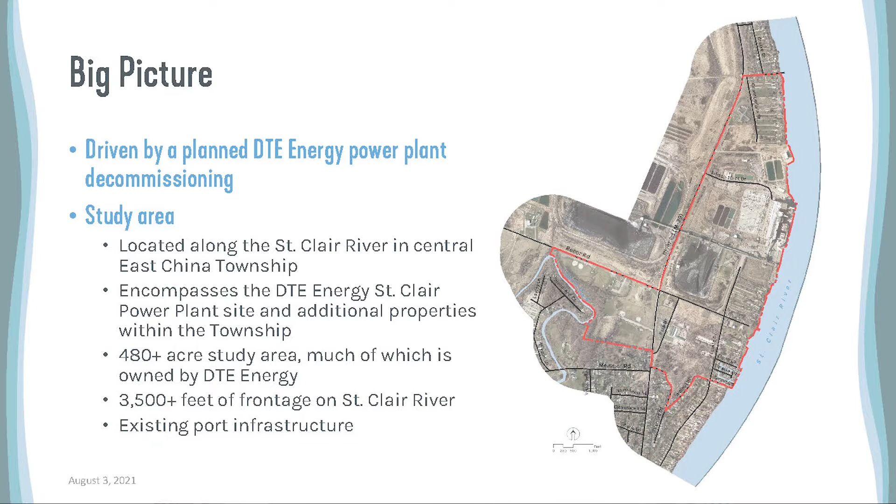So this study is not just a focus on the DTE site, in recognition that the DTE site doesn't just live in a vacuum or on an island of its own. It's integrated amongst other uses—residential, commercial, industrial. So if we're going to think conceptually about how the DTE site could transition over time, we also have to think about the surrounding land uses. Some of you probably are residents either nearby or within the study area. So rest assured we're going to be considering how land use, transportation facilities, and infrastructure are all intertwined within this study area.

So this map kind of shows the study area, which is in the central portion of East China Township. And you can see the St. Clair River there, so we're kind of in the middle, about halfway between Lake Huron and Lake St. Clair.

So one of the reasons the township wanted to move forward with this study is they know this could have a significant regional impact and opportunities to benefit the region. With the closure of a power plant, you have a large site that's heavily industrialized right now that could become an opportunity for redevelopment. That economic development potential could attract job producers or different diverse land uses. There's also an opportunity to restore and protect the environment and encourage environmental sustainability, and an opportunity to potentially have new public lands or opportunities to recreate in and near the water. So that's some of the reasons for this study.

The township is thinking, okay, what are going to be the keys to having a successful plan? Certainly, with DTE being the largest landowner within the study area and clearly a major stakeholder, we wanted to ensure that this plan has close coordination with DTE Energy. And that's why DTE Energy is with us tonight and a part of this process.

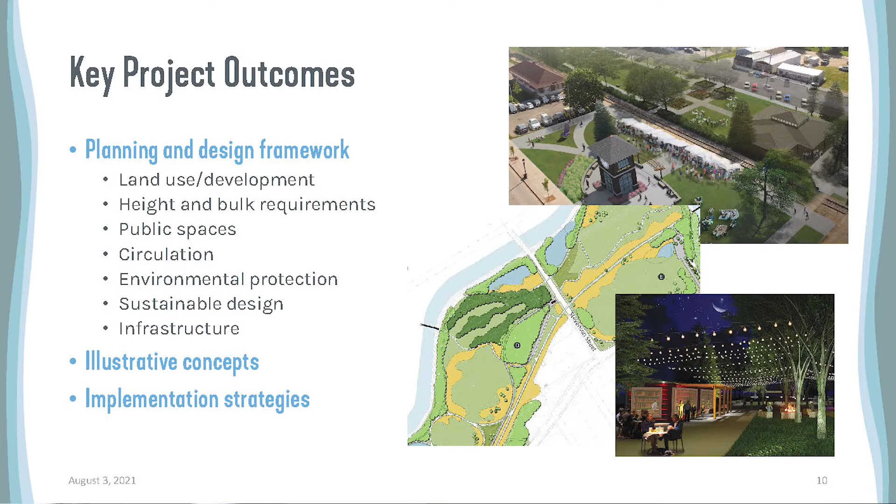And then lastly, before I open it up for some questions on this section, the schedule for this planning project. So we started earlier this year doing some background and existing conditions evaluations. I'll present to you some of the highlights and what we found. We also looked at environmental characteristics. And here we are tonight at the public informational kickoff meeting. So this is really the first launch of this project to the public. We're trying to provide some good information for you tonight so you have a good understanding of what this project is all about.

After this meeting, we're going to get into some additional work, research, and analysis. We're going to maybe look at some redevelopment scenarios. We're going to start thinking about the future, what could be. But we're, of course, going to come back to you in a session, maybe in the same facility, but you might be sitting around tables for that session. I'm not sure, we'll come up with the format for it. But right now we're calling it a public visioning or charrette session.

Basically, that's going to be more about working with you to bring in ideas to help provide some feedback to our team so that we know what you would like to see moving forward for this project. And then it kind of continues on. So we're looking at before the end of March 31st next year to have this planning project finished up. As I said, there will be a public hearing in front of the Planning Commission that would occur probably at the end of this year, maybe January or February of next year.

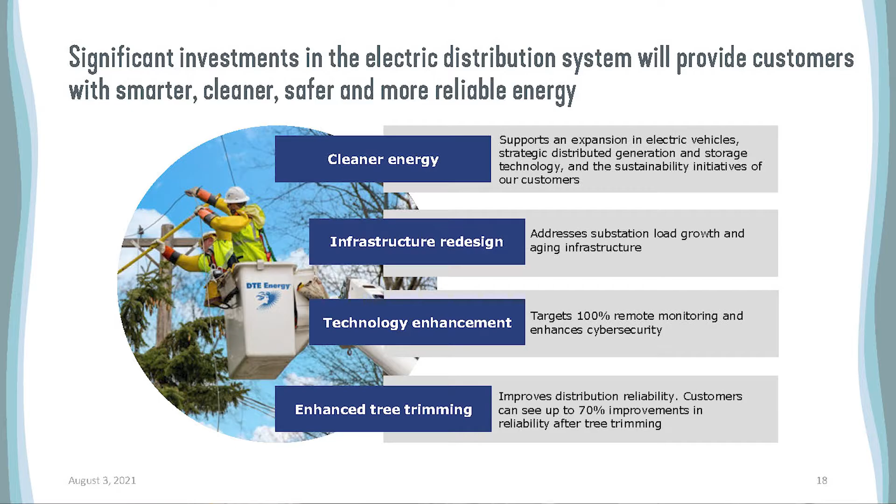In communities where we've had tree trimming, we've seen 60 to 70% increase in reliability. So while they're beautiful, we need to plant the right trees in the right places. And as we go through that process, we hope to see more improvements in reliability in communities where we've seen trees really impact their ability to serve customers in a good way.

We started figuring this out and going through the exercise of what Blue Water might be, I believe, in 2011. So we began designing, having internal conversations, trying to figure out what the technologies were for the future and what that looked like in terms of what we needed going into our next generation of energy supply.

That process not only included engineering and design, it includes a process with the Michigan Public Service Commission to go through almost like a legal case. It's about a 270-day process where we present a plan, and we have the ability to go in front of the commission and the staff and explain what our plan is, what the benefits are, what we intend to do, what the cost is, et cetera.

During that time, it also gives people an opportunity to voice concerns, voice support, and really have a conversation similar to the format Adam's described here with what we're doing over the next few months with Township, to really get a sense of, is this good, is this not good, what are we not thinking about, what are we not considering, who have we not thought about, how does this impact not only our generation, but what the state looks at as a whole.

Michigan is unique. Michigan's a peninsula, so we can't put poles and wires over the Great Lakes. So we have to have a certain level of generation done within state to be able to supply the percentages that our regulators require. So when you look at how the composition of this works, those are the things that you have to keep in mind when you're building new facilities and new generating sources.

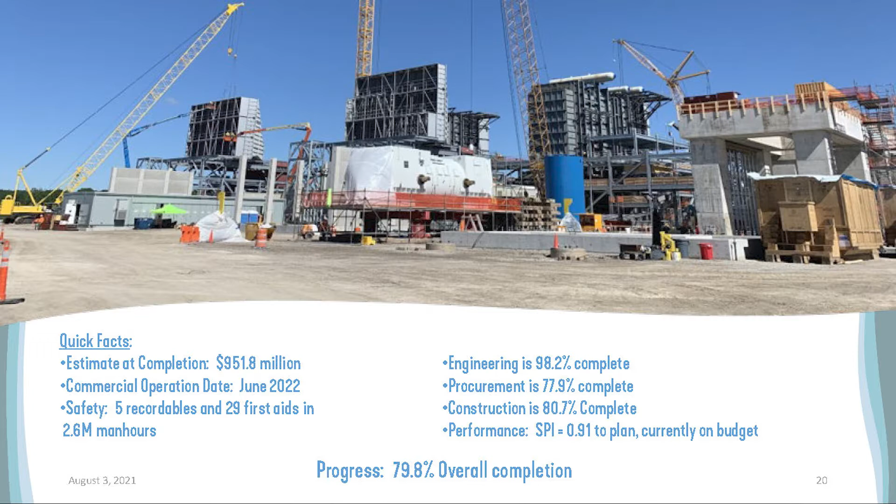So that's going to be something that's going to start up this fall as we complete the building of the facility. Next slide, please. And this is what it looks like as of right now.

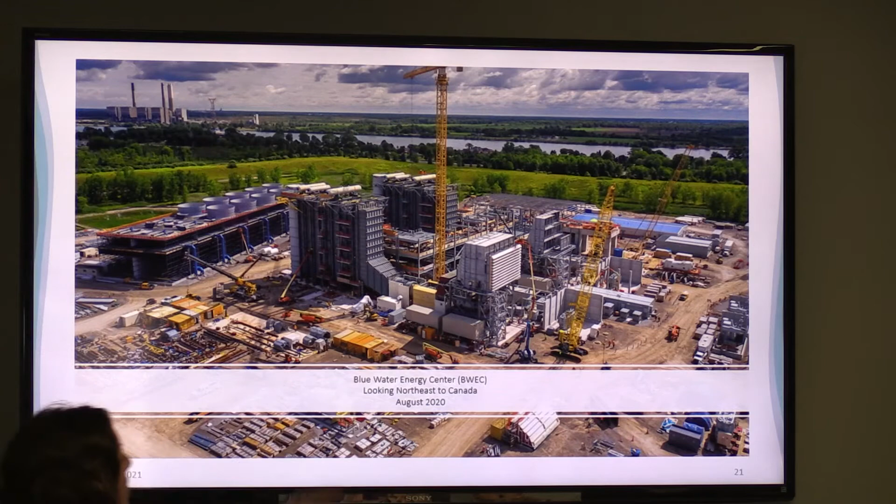So it's pretty cool when you think about it. So you've got the crane that you've probably seen from M29. You've got here your two steam generators. Here's your cooling tower. That's our warehousing and our administrative building over to the east. But it's pretty impressive what's been done in a very short period of time.

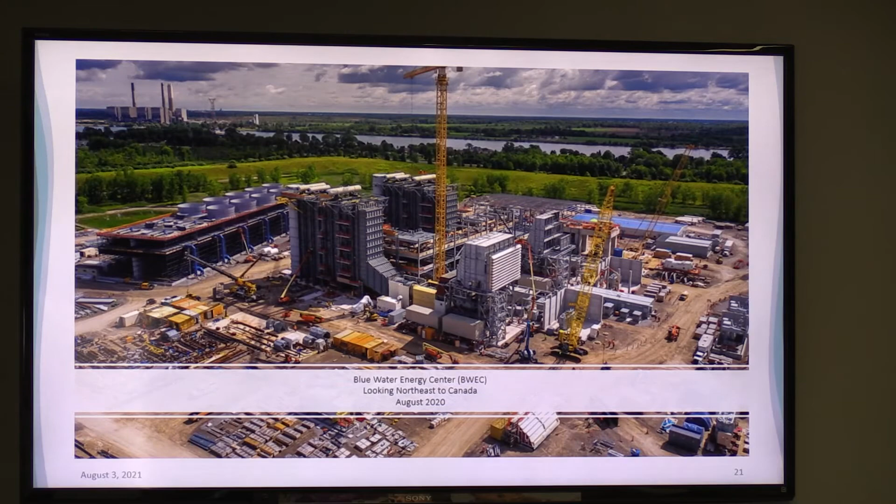We broke ground in 2018, August 2018. And three years later, we almost have the full power plant ready to go. Next slide, please. All right, that was a lot. Any questions?

All right, I'll start this one and I'm going to hand it back over to Adam. So, as I said, DTE is going to retire St. Clair in May of '22. Question about the coal and the stacks.

So we'll get into this later, but Belle River is going to operate until 2030. That's our plan right now. Belle River needs coal, and the coal comes from the river at St. Clair, so that stuff you're going to see for a while. It's not going to go anywhere. Just because we close the plant doesn't mean we're going to tear it down right away.

So keep that in mind as we go through this, because like Jeff said, there's a process involved with decommissioning, doing studies, turning things off the right way according to our regulators, and the process that Adam's going to walk through, and then figuring out what is the next step for us. So there's a lot that goes into it. Just because it closes in May of next year, don't think it's going to be immediately torn to the ground, due to those steps that have to happen to decommission it properly. And with that, I'm going to hand it to Adam to talk about that process.

Okay, all right, so I'm going to go through, from a general perspective, the coal plant decommissioning process. Stephanie's not quite off the hook, she's going to pop in and jump in as necessary. She talked a little bit more specifically about the St. Clair power plant, and I think there's going to be some slides after this that will again get into more specifics about the retirement of the St. Clair power plant. But these next handful of slides here are kind of from a general perspective: what is the process to decommission a coal plant?

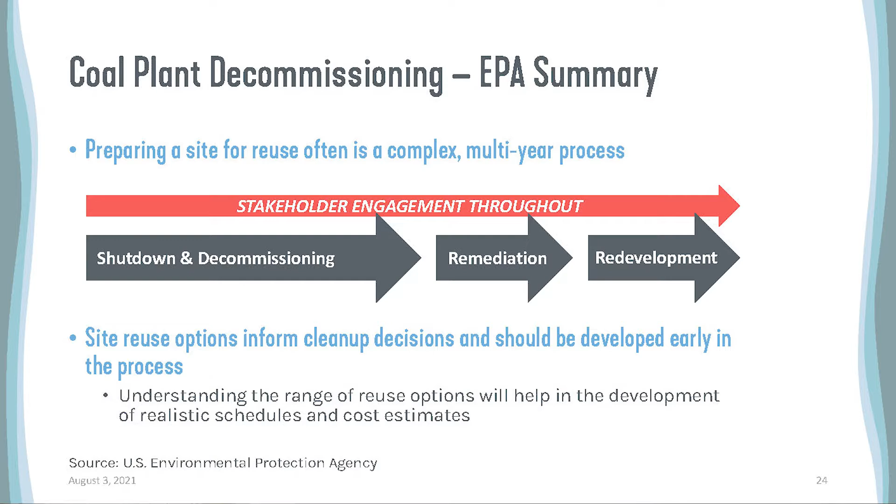We agree with EPA's point here, that the planning for the future, planning for site reuse options, ideas and concepts, is very important. And even though redevelopment occurs at the very end, having an understanding at least of the opportunities and potential site reuse options really helps to inform decisions that are made earlier on in the process. And so we took that to heart and said, okay, well, we ought to start this process with a planning study, certainly from the perspective of the township, to make sure that the township is prepared. But also, the results of this study are going to certainly inform DTE's thoughts about what they can do, and their understanding of what could be at the site, and what it means to help throughout this multi-year process.

So the shutdown and decommissioning phase begins with the announcement of the closing that has occurred for the St. Clair power plant. But again, this is not anything specific about DTE here, but in general, the owner of the power plant has several options to consider for managing this decommissioning process. It could be where the owner maintains full control throughout the process, or maybe they select a third party to help oversee it, or potentially the power plant owner could sell the property to somebody else, or maybe even a governmental entity.

The removal of equipment and materials at the site, even demolition of facilities and buildings, all can be done in compliance with the state permitting requirements. That's all involved in this shutdown and decommissioning phase.

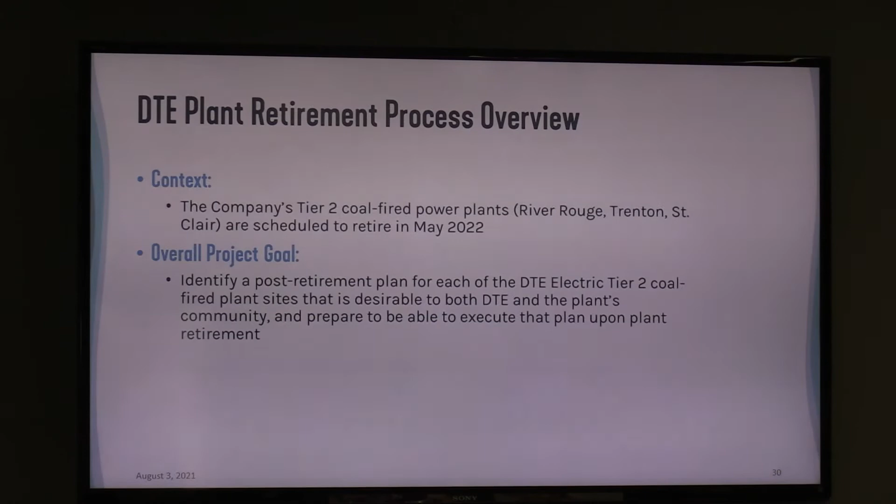I'll turn it back over to Stephanie to talk a little bit more about the specifics of DTE's process.

Getting a little more specific into what we're thinking about for St. Clair: our biggest goal is to make sure we hear from all of you—from Adam, Jeff, Brian, Cindy. We want to know what the community's desires are for this area so we can take that into account as we go into our planning process to determine what the next steps might be.

Like Adam said, it is a long process. We've got folks starting to walk through the facility now to figure out the first steps we can take as we begin the decommissioning process, and it's going to take some time. Our primary goal is to make sure we have heard you, that we understand what the community wants, and that we can take that feedback into our process as we go through this in the years ahead.

This is the more fun slide—this diagram gives you an idea of what the property looks like. Hang on one second here.

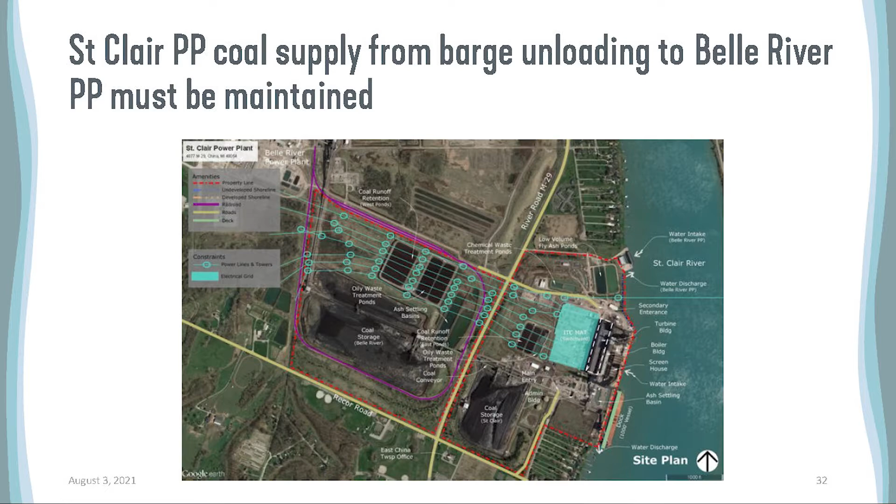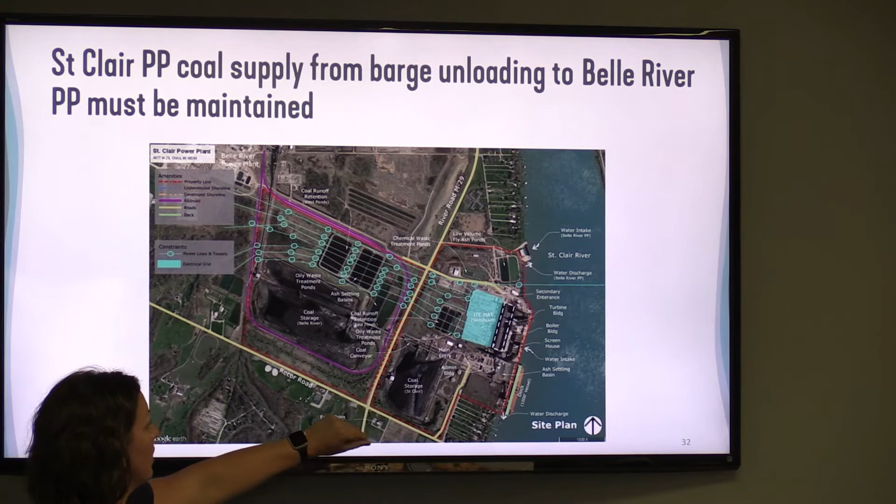This diagram gives you an idea of what the property looks like. Here's your riverfront, and you have the ability to see what the footprint is. We have coal storage that will still be maintained with the Belle River Power Plant in operation. This is actually the coal for the Belle River Power Plant, western coal that's burned, cleaner coal. We also have different repositories and things that may be part of the remediation immediately, but this gives you an idea of what this looks like.

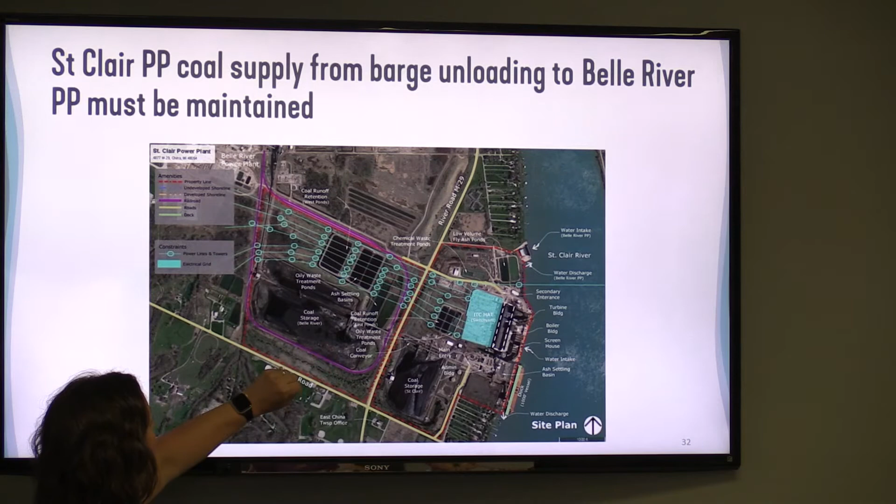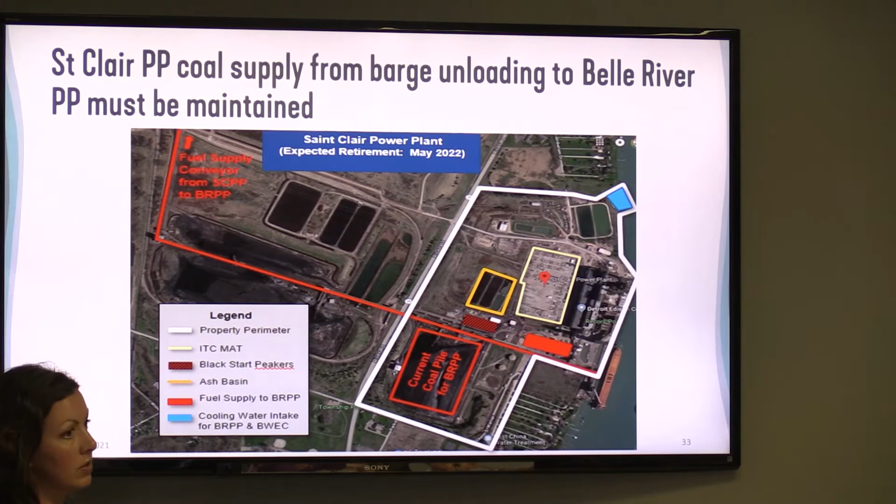Let's go to the next slide, there's a better picture of it. So this is going to stay put here. You're still going to have your coal freighters for a little bit longer. I've been asked when the coal freighters are going to go away, they're going to still be there for a little bit longer. Right now, Belle River is slated to run until 2030. St. Clair powers Belle River with barges of coal and the process for the coal to come over. The conveyor across M29 that carries the coal over will still be operational as long as Belle River is in operation.

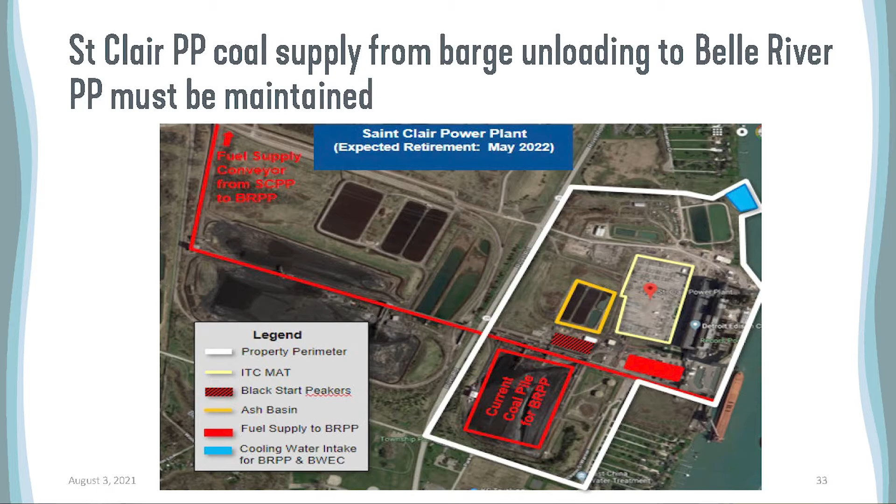You may not see physical change immediately, but we will be planning and figuring out what those steps are to go through those physical changes when the time is right, based on what needs to be maintained at the Belle River site, or at the St. Clair site, to run Belle River. I'm going to pause there, any questions?

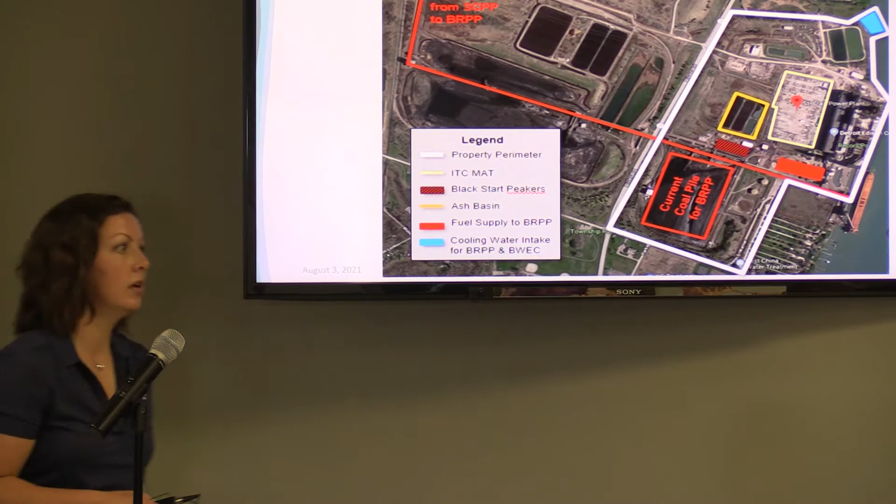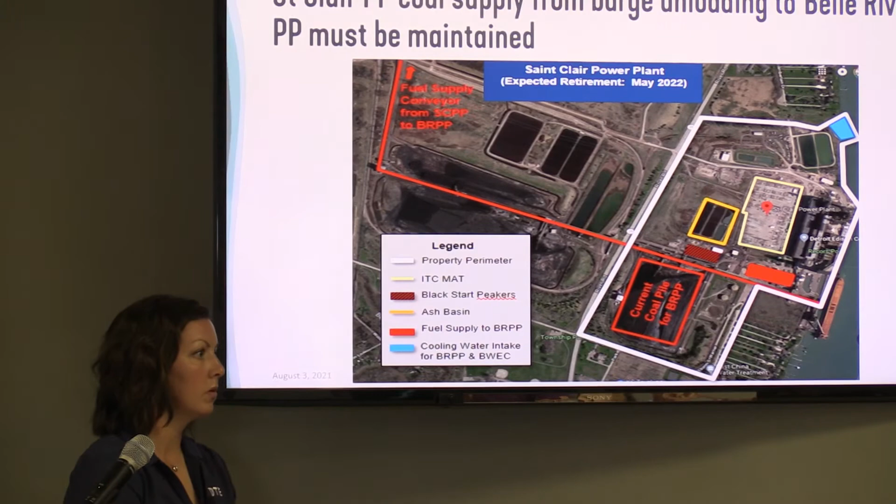Yeah, go ahead, sir. I was just thinking, until '30, because you said at '30 the Belle River plant would be decommissioned or whatever. We aren't talking a great deal of land as compared to what you own, meaning DTE. I'm looking at that red stripe up to the white stripe and a little blue intake over there, and then the plant. That's about the only amount of land that will be developed before '30, is that correct?

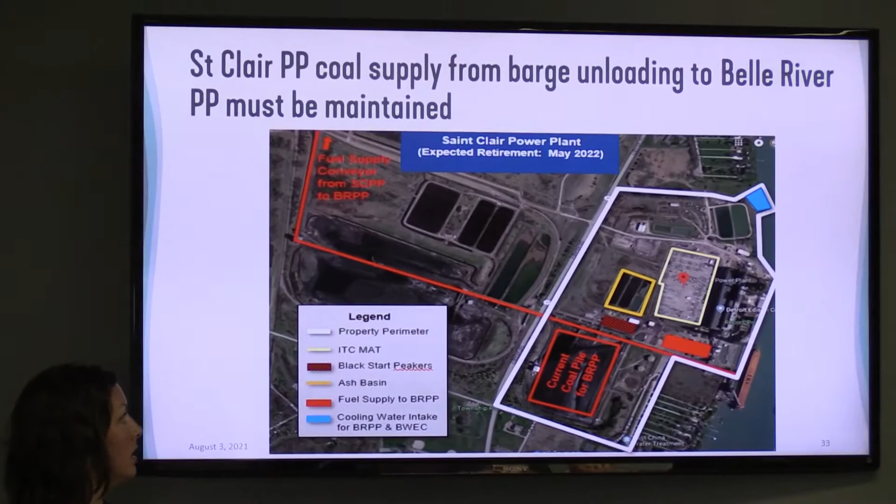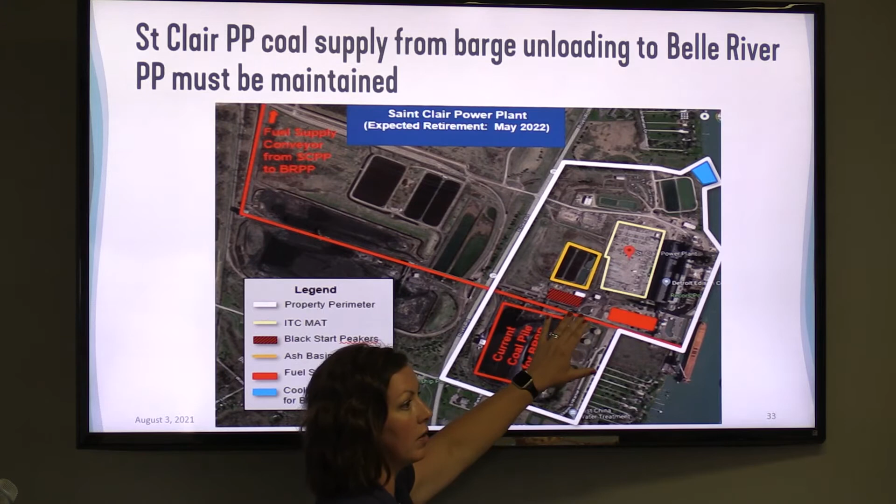Not exactly. It depends on what needs to be used in this area. There are still areas on the dock that need to be used to convey the coal and carry it over, and run the process for Belle River to run. So this may look the same physically for 10 years, this may look exactly how it looks now until 2030 potentially. It may not, I don't know the answer to that, but it could. It's going to depend on how they've configured the working operations to keep Belle River going until 2030. If things develop quicker and we're able to retire parts of St. Clair and start decommissioning parts of it as Belle River is running, we're going to explore that too. That's all being discussed right now. But you may not see a lot of physical change due to the fact that St. Clair still plays a vital role in powering Belle River for the next, it'll be 8 years now that we're almost in 2022. Does that answer your question?

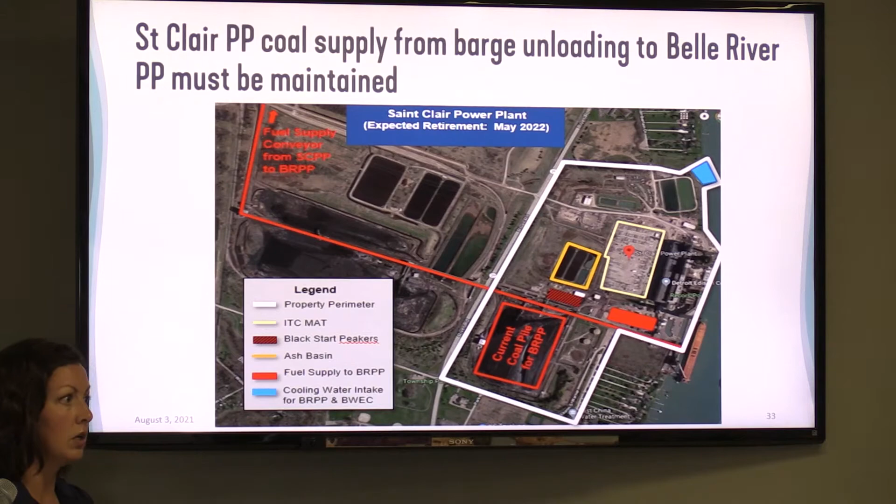You're welcome. Yeah, go ahead. I have a question about the new area that would do the cooling water intake, that runs directly to the Belle River plant. And so that would not be touched closure of Belle River?

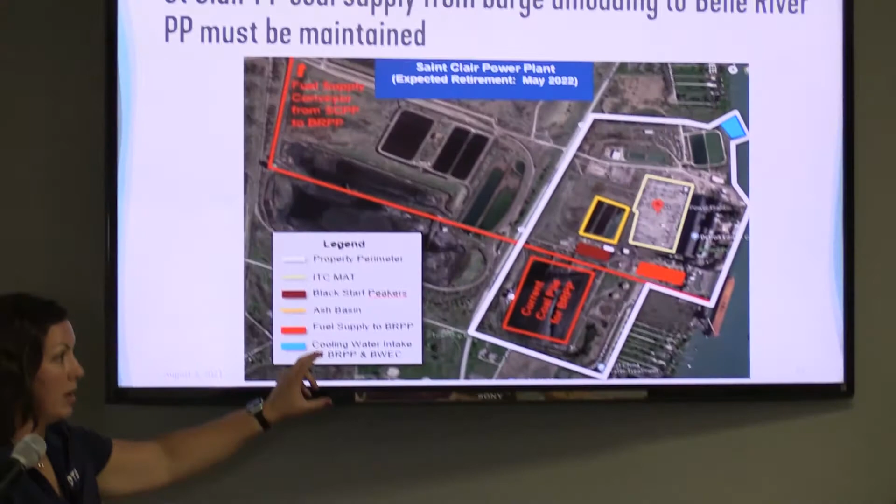It may not get touched at all because it's actually going to support Blue Water as well. So there may be some ways that they alter it to allow it to support the Blue Water Energy Center that's coming online next year. It probably will look different in some capacity, I just can't tell you exactly how right now, but knowing it's supporting our new power plant, it may be there in some capacity.

Well, will the new generating station depend on water for cooling? It will, but it's much more efficient. It's actually going to have its own steam process to help cool it within the system. Blue Water runs similar to the way an airplane runs, so if you know how a jet engine runs... Cindy, I can get you some links to how this works for the website.

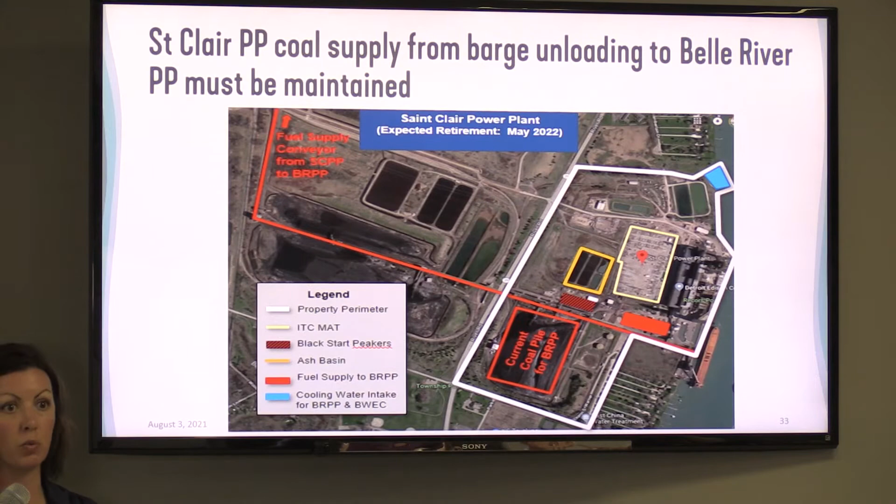Essentially, the two turbines that we're building at Blue Water run like the jet engines or propellers on a jet, so they ramp up and ramp down. The water actually goes back through the facility and is recycled as much as possible, and it's much more efficient. So we will likely see less, but we will likely still see some use of that area. Does that answer your question?

Yes, I just wondered how long that's going to stick out each year. That question I can't answer for you at this point. That's where my 'it depends' comes in, right? Why not? If I had a crystal ball. But yeah, those are the things we have to figure out - what do those dynamics look like, new plants coming on, old plants coming off, what do we have to keep to help us run those plants, and what can we work on to redevelop that area in a way that works for everybody.

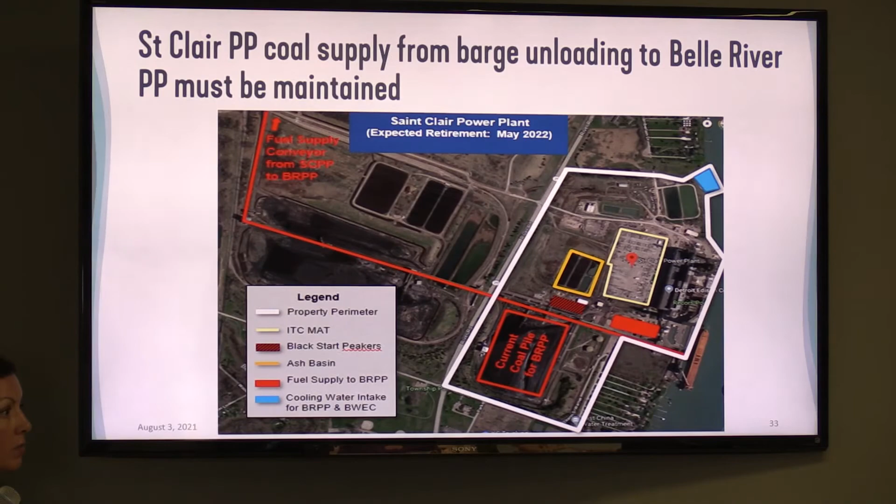So, excuse me for asking a second question, but as I get the drift of what we're talking about, the next 10 years you'll have very little change in the use of the land that you now control, that we call DTE as a group. I'm asking the question: in the next 10 years, the property will remain pretty much the same. Use of the property internally for you will change. But from a community standpoint, the fence lines and all the things we see around the property are going to be still there and not developed or hardly developed.

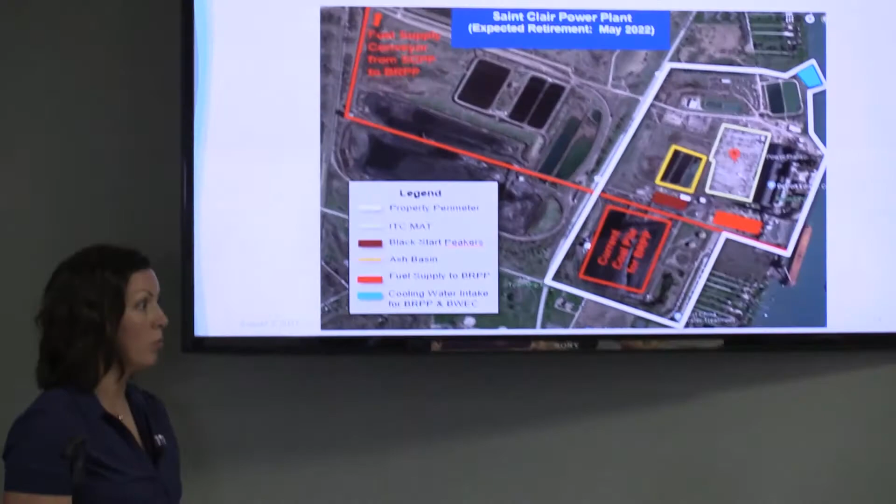Yep, at this point that's accurate, yes. Until we have both of the coal plants retired, we have to keep things up and operational to help Belle River run. So you may not see a lot of change in the actual footprint of the plant.

But to Adam's point, we want to know as we figure out what is going to happen there, because once we have the ability to move on that process, we've been able to move quick. We demolished Connors Creek pretty quickly this past year as part of the FCA development in Detroit. So we want to know what we're going to do there, and that takes planning. The Blue Water Energy Center took a lot of years to plan. This is going to take a lot of years to plan.

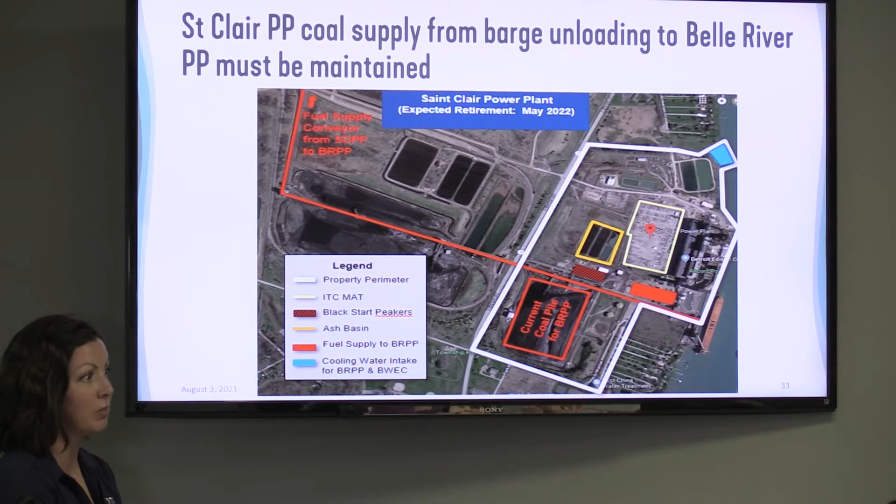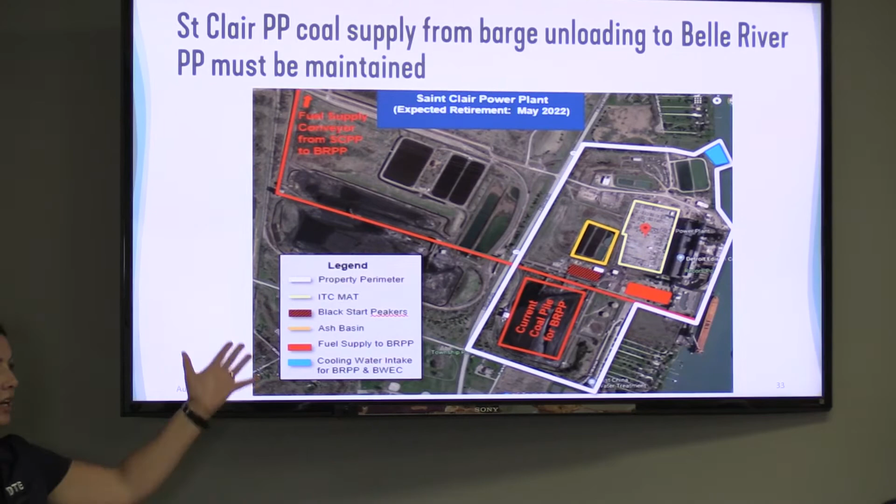So we want to start doing this and talking about it now, so when that time comes, you guys aren't looking at the same thing you've been looking at for those times. Hopefully that helps. I know it's not a definitive answer, but I hope that gives you some perspective. It gives us an idea. So we're going to do upfront planning, and then we need to have some patience to wait for it to be implemented over time. Absolutely. But that kind of gives you an idea of what the footprint of the property looks like, so hopefully that's helpful.

And like I said, we're working on it. I think that's kind of the message - we're working on it, and this is one of the first steps to make sure we're including the feedback from the community that lives in the area to figure out what is desirable in that area, so we take that back and have the right conversations with the right folks internally. So with that, being mindful of time, I'll turn it back over to Adam. Any other questions on that?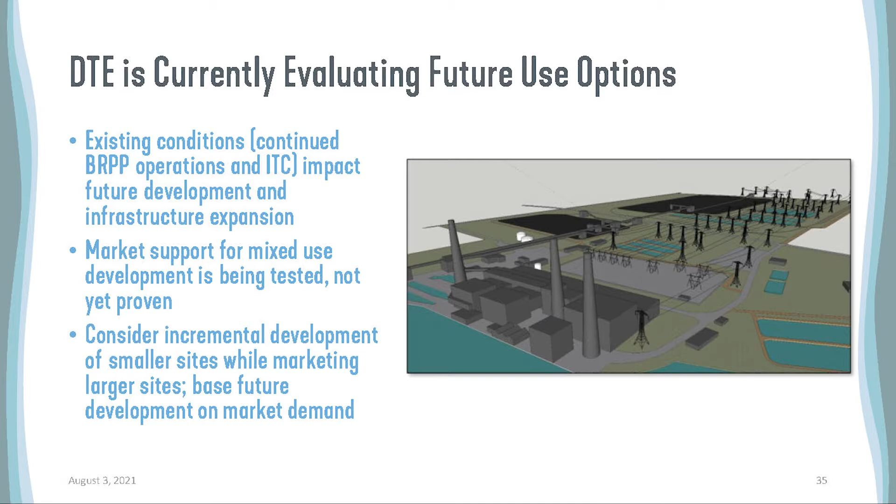Okay, so I'm going to cover some highlights of the existing conditions assessment. This is one of the things we've done work on at this point. When you're thinking about master planning or conceptual planning, long-range planning, it's very similar to planning for a family vacation. You need to first understand the resources you have today, where you are today, and understand what works for everyone - what's a good mix we can all appreciate. That helps you choose where you want to go in the future, and then of course there's the roadmap for how to get there.

So what we're looking to do with this existing conditions is have a better understanding of where we are today, what's in place today within our study area - not just the DTE site, but our study area as a whole. Once we have a good understanding of that, we can talk about moving forward. This really provides the baseline assessment for what we have today.

So we took a look at existing land use - how is the land within the study area being used today. We've got a map that's color-coded there that you can see on screen.

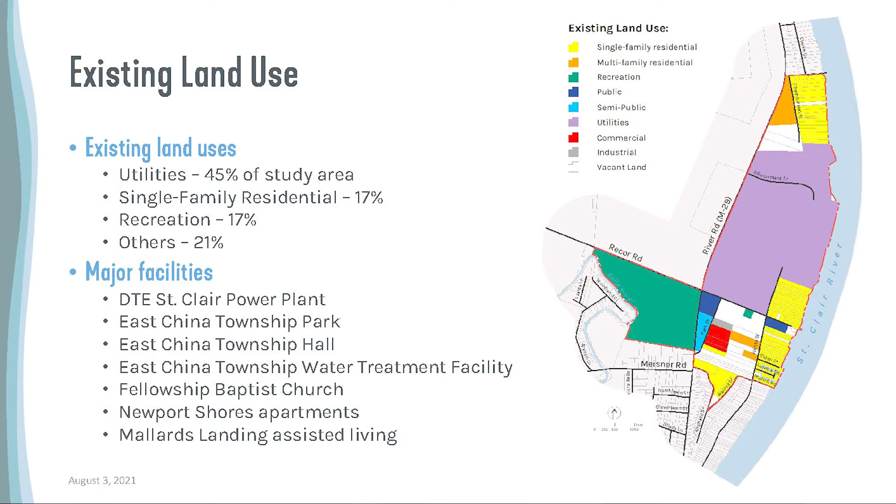That's the DTE St. Clair Power Plant building footprint right there. Just the footprint itself in terms of area is 370,000 square feet for that facility. So that's obviously the largest building in the study area in terms of the footprint.

Aside from that, and then maybe the assisted living facility or the apartment complexes - the assisted living has a footprint of maybe 50,000 square feet, the church maybe 5,000 square feet. But the remainder are scattered small single-family dwellings, predominantly within the study area, generally surrounded by larger properties.

In particular, along the riverfront, a lot of the single-family homes are narrow but deep. There are some in this southeastern corner of the study area, some canal, smaller lots fronting the canals there. So that map and some of the pictures here show some of the land use characteristics of what's going on within the study area today.

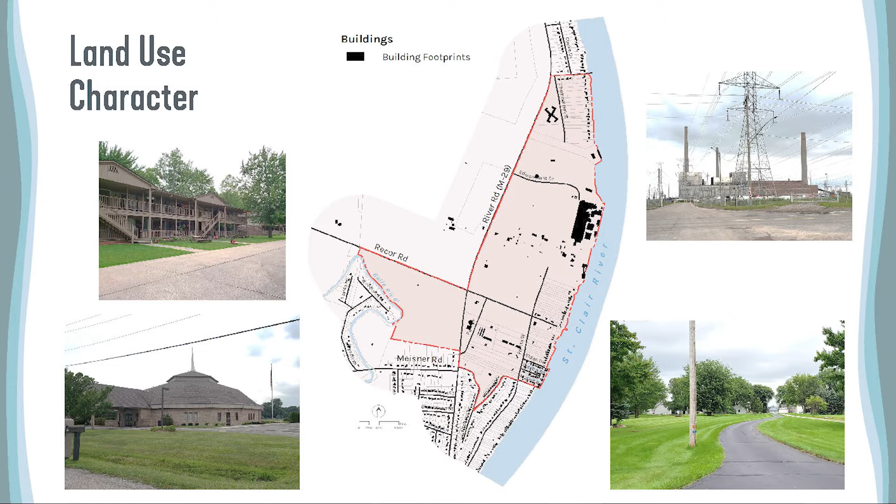So we certainly need to know and understand, as of today, what the township has proposed for and what they currently regulate for in terms of the study area land. So we're talking about currently adopted master plan and zoning codes. East China Township's currently adopted master plan is dated 2015.

And that map on the left side shows the color coding for the future land use classifications within this waterfront study area. A future land use classification is basically the township's indication of policy over time, long range, of their desire for what types of land uses should occur over time. So you've got in green the township park facility.

You've got in red some commercial facilities. In that brownish color is multiple families. So even though some of those lands are vacant today, you can see that the currently adopted master plan calls for some additional multiple family residential growth. And right now, the DTE power plant site is simply shown in the master plan as industrial.

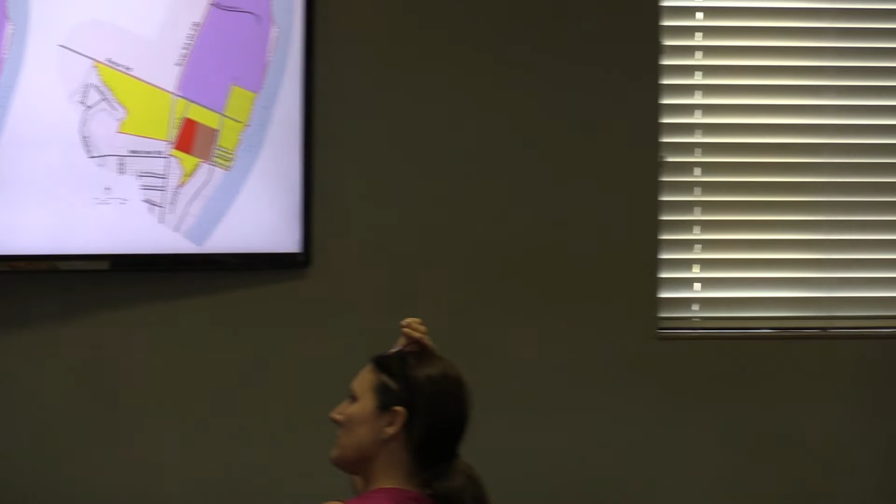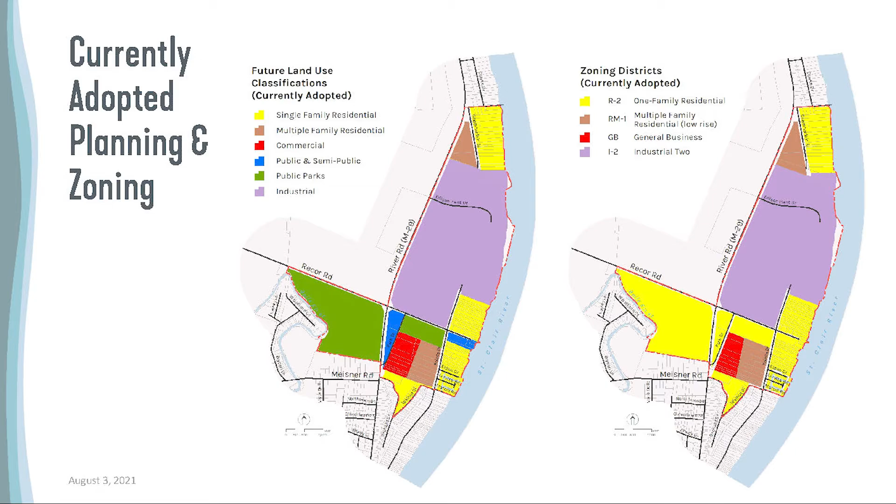So then, are you guys looking at doing the park one day as maybe single-family residence then? Yeah, it's interesting, don't be scared off by that. It's not uncommon for a township facility or even a park to be zoned residential. That does allow parks. The township has no intentions of giving up that park property or allowing it to be developed as single family. There's typically not such a thing as a recreational zoning district. Usually parks, township municipal facilities are often zoned single family residential. Don't let that scare you off.

No, it's not a scary thing, I just was curious. Yeah, it's a great question, good question.

Infrastructure, there's a lot of infrastructure here. Stephanie talked about the power plant infrastructure, the ITC electric transmission lines and the MAT that's located at the DTE facility right now. But we also have township services and facilities. This is really kind of the center of the township, with the township hall being located here and the township park being located here. It's a great middle point for all residents to access this area. So in that sense, it's kind of like the heart of the township. Opportunities there. Water, sewer lines, all public infrastructure is well in place to serve this entire study area.

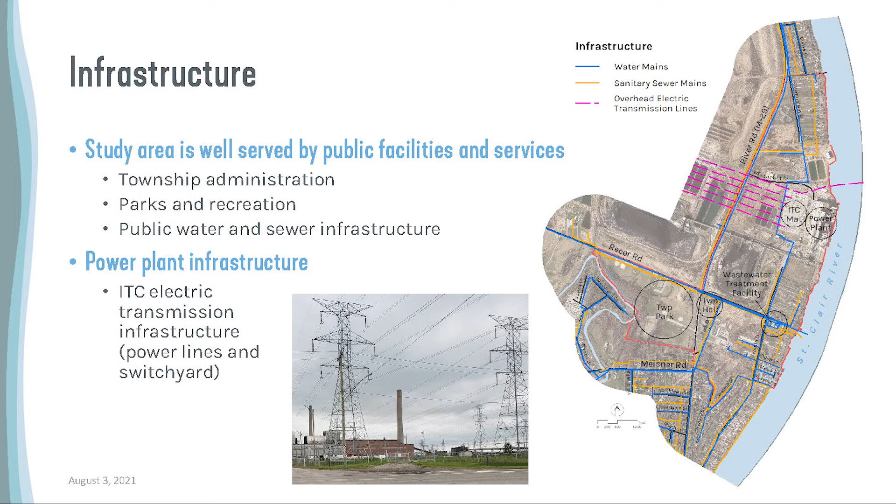Transportation. You are all familiar with the roads here. Obviously, we have the state highway that runs north-south through our study area. It is a designated truck route. According to MDOT, they call it a minor arterial road. It just means that it's designed to handle quite a bit of traffic at relatively higher speeds to move people through.

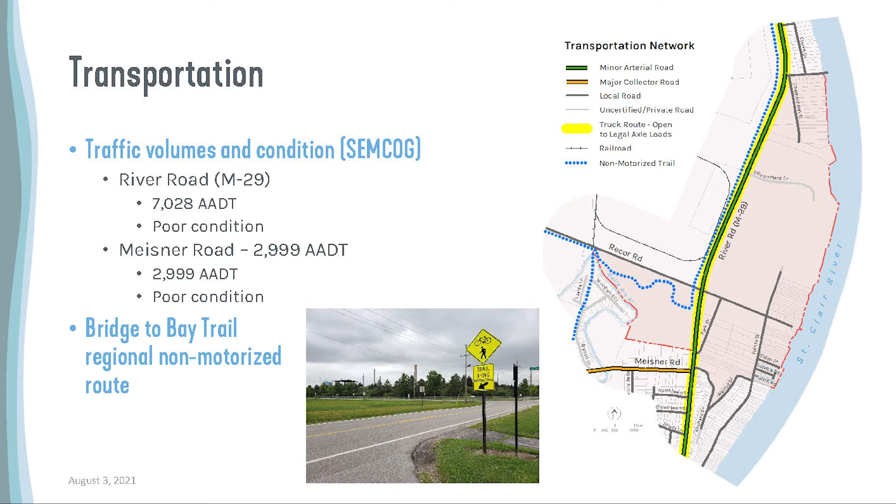That dashed blue line is the non-motorized regional trail, the Bridge to Bay Trail, which is a great amenity that runs in and through this study area. You can think about expanding upon that as maybe part of the redevelopment or tapping into it or connecting to it. Certainly an opportunity.

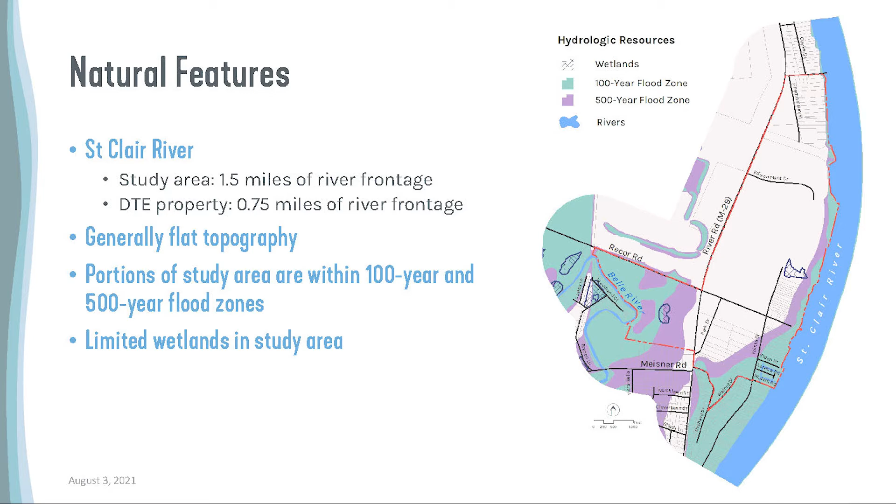We need to understand the carrying capacity and constraints of the land to support future development. At the same time, we can think about how to plan and design to improve resiliency in the natural environment, maybe through shoreline protection and other measures to help mitigate or limit flooding.

In summary of these existing conditions, the conditions pose both opportunities and challenges for redevelopment within the study area. The riverfront is a major opportunity for public access and open space, and for transportation access, whether recreational or freight.

For the natural environment, dealing with coal plant remediation means potential contamination issues, which is a challenge. But there's an opportunity to improve and restore the shoreline, or employ sustainable design practices in new development that would help improve resiliency within this study area.

The infrastructure is already in place to support development, but at the same time, some infrastructure needs to remain, at least for a short time, to support the Belle River Power Plant. That means there may still be fences and similar restrictions for now, since we can't allow people to access those restricted areas for safety and security reasons.

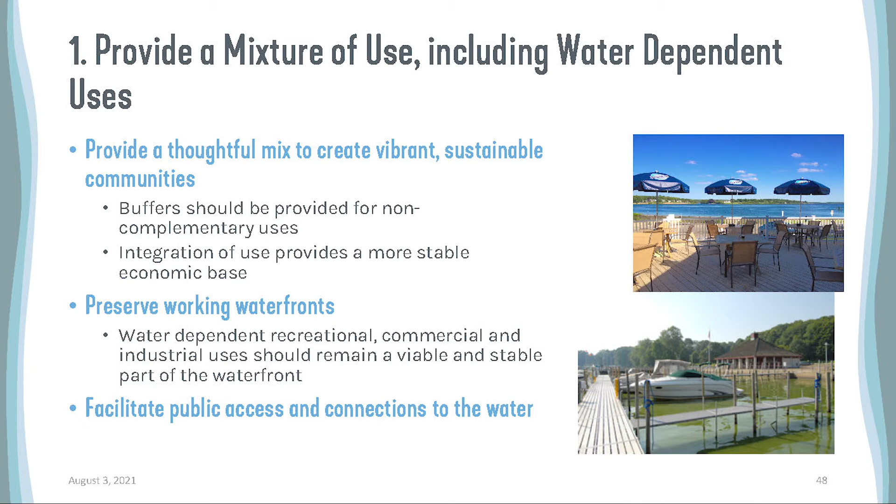If you have one type of use, say all industrial, you might have a workforce during the day but nothing happening in the evening. If you have a mixture including commercial or residential, you can have people coming in and out during the day and residents living there in the evening, with recreational access providing additional weekend-type use.

So it helps create more activity within waterfront areas. A best practice is to preserve working waterfronts, or at least recognize that a lot of historic development along lakes and rivers is of a working nature—industrial, port facilities, commercial uses, fishing, recreational—that's all part of the working waterfront. Don't ignore that; include it as part of your thinking for future uses, and certainly facilitate public access and connections to the water. So the mix of public uses within private uses is important and recommended as a best practice.

The second best practice is taking advantage of compact community design. It goes without saying that if you accommodate more use on less land, you're being more efficient in the use of land. There's a limited amount of waterfront and riverfront land, so it comes at a premium. The EPA recommends that communities consider allowing, for example, more intensification within waterfront communities.

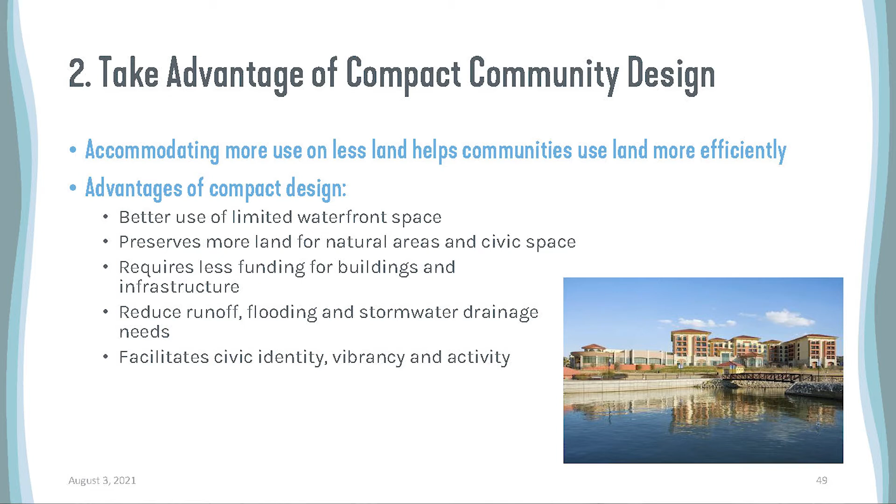Higher density within waterfront communities has advantages. You already have infrastructure in place, so you're making good use of it and better use of that limited waterfront space. A higher density of development generally reduces runoff and can have positive flooding and stormwater benefits. More density and activity also facilitates a sense of place, vibrancy, and activity within a waterfront district.

That slide hits on something for me—that's obviously a commercial development, the East China picture there, right? I'm just saying the county's not going to develop that, but Tina Frazier with our Economic Development Alliance is in attendance tonight. If those are the types of reuses the community wanted, our economic development team would go to the street and talk to investors, developers, those types of things, and try to bring them to the community to facilitate something like that. That's what they do—they chase companies and investment. So the county's not doing it, but there are opportunities depending on what fits. That's why we're building partnerships, and building momentum toward implementation. The more people you have at the table and partners who can help with this process, the more realistic and viable it becomes over time.

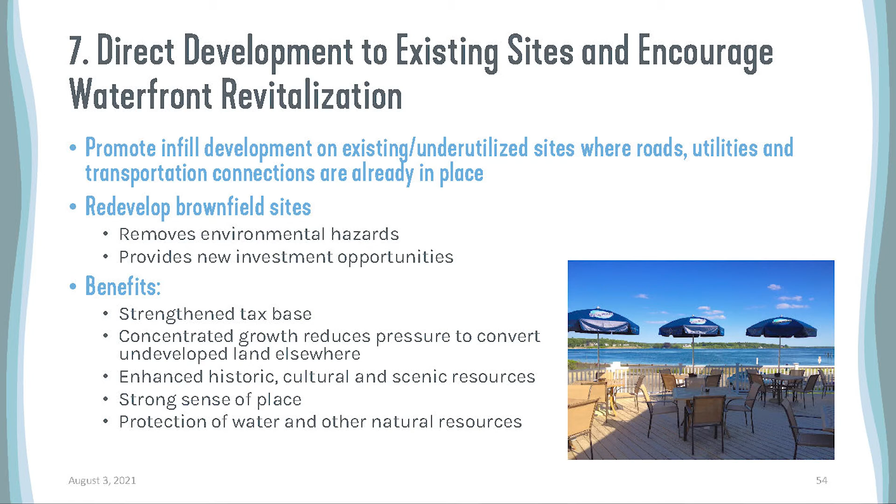Direct development to existing sites and encourage waterfront revitalization—that's one of the best practices. Our study area is a district with a large site with good potential for redeveloping, an existing site with utilities and transportation connections largely already in place. So redevelopment of brownfield sites is certainly a best practice, for removing environmental contamination or hazards, but also providing new investment opportunities. Additional benefits include a strengthened tax base, a stronger sense of place, and enhancing and capitalizing on your cultural and scenic resources.

Again, back to providing a variety of transportation options—in a waterfront district, it even opens up more opportunities. There's actually a picture of a day-use marina, which maybe you mentioned would be great within East China Township. So some transportation strategies that waterfront district communities have sought to implement are considered best practices: considering water-based public transportation options, maybe a water taxi, or docks, launches, and marinas for private and recreational watercraft.

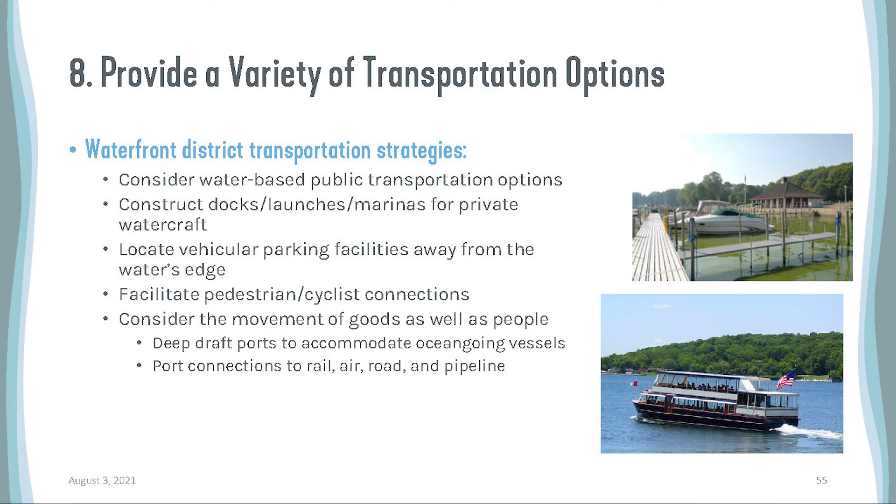Certainly not providing parking spaces along the waterfront itself, but strategically locating parking spaces away from the water, maybe in a central location, and then providing ample connections to the different uses from that more central parking area. Certainly facilitating and designing streets, entrance roads, and sidewalks to accommodate pedestrians and cyclists as well.

And also don't forget the opportunity for the movement of goods and services as well. So the fact that you have a potential port facility or something like that in place already, so you can consider those type of connections as well.

And the last two are more about public policy. So this one would be most applicable to, say, the township. As the township wants to facilitate good waterfront districts and communities, the township, as a best practice, should make their policies, practices, and zoning rules predictable, fair, and cost-effective. In doing so, they can support the private sector in making investments within a waterfront district.

So the township should look at streamlining their review procedures and maybe timeframes. Should it take six months for a project to come from start to finish through the township, or could you streamline it to encourage development or allow development to come through within a couple of months?